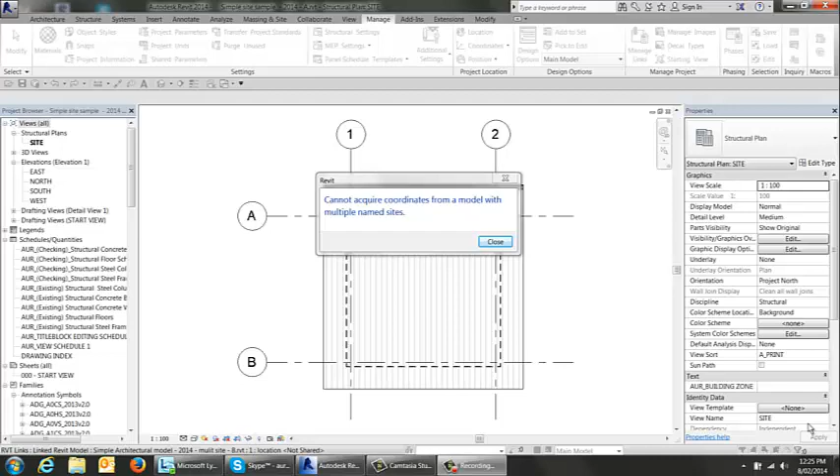Now, what you're seeing on the screen is the error messages directly after I try to do an acquire. So I'm in a model of my own making, and that's an architectural model, as we've seen before, and I try to acquire the coordinates. Now, Revit's error is cannot acquire coordinates from the model with multiple named sites. As I mentioned to you before, this is an example of one Revit model with multiple locations. So in the example of our little shelter we've talked about before, this particular building is used multiple times on the one large site. One Revit model, but multiple stored locations.

So what I'm going to do first is just show you how to establish more than one location in your project. So you're driving it, you're setting up the locations. The second example I'll show you, same example, but this is an example where you have to establish your models in the correct place from an architectural model with the shared coordinates. So it'll be evident what I'm talking about and just how to do it. If you're lucky, the architect or whomever will give you a site model, which will make your job a bit easier. But if you haven't got a site model, this is the workflow.

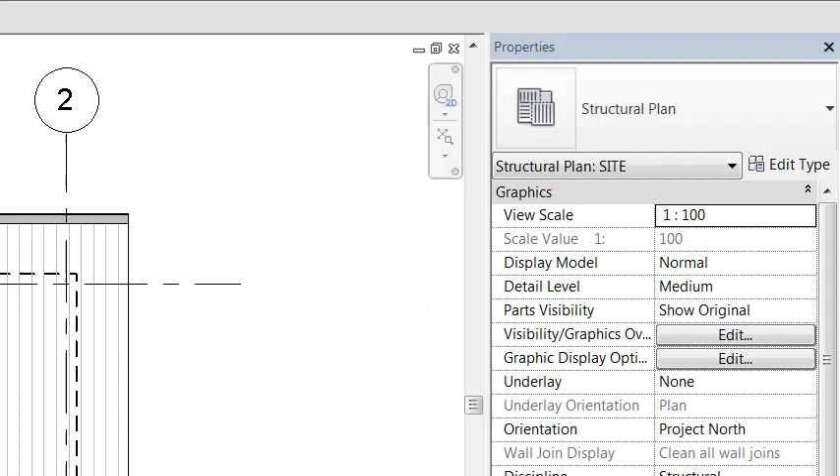But anyway, first I'll go through the example of you're in control, you're wanting to store multiple locations in your model. So what I'll do first is just unlink my model that I had that error from. Okay, so I'll just get rid of that model. Now, this is a new model that I've created. It's just called site. The example here is I want to establish a site model so I can store multiple locations in the building model I'm going to add. Now, the building model I've got has shared coordinates already. This site model hasn't. So the building I've got is just one location, but it's got site coordinates for one of the locations, and this is a blank site model.

So the workflow is as follows. Just before I go on, I've actually established a view called site with unlimited top, unlimited bottom, unlimited view depth, and then that maximum number, which is 6 nines, that Revit will take for the cut plane. So we've got a plan view here that's basically limitless up and down. So wherever I bring this model in, we'll see it.

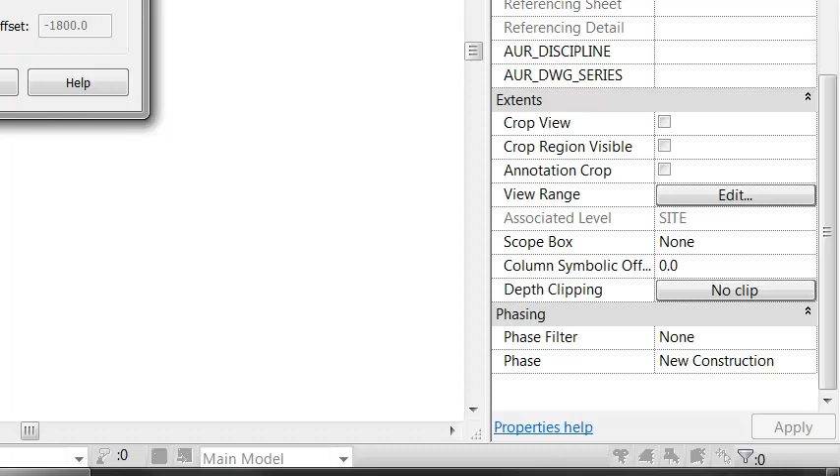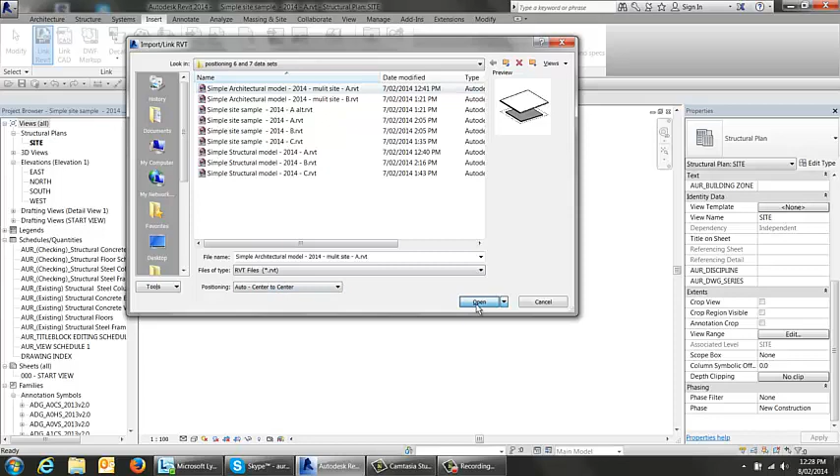Okay, so the first step is I will just link Revit, and all these data sets are available for you to have a play with yourself. So I'm going to pick the simple architectural model, so it's data set A, and I'm going to insert center to center. So there's the model come in as we've seen before. Okay.

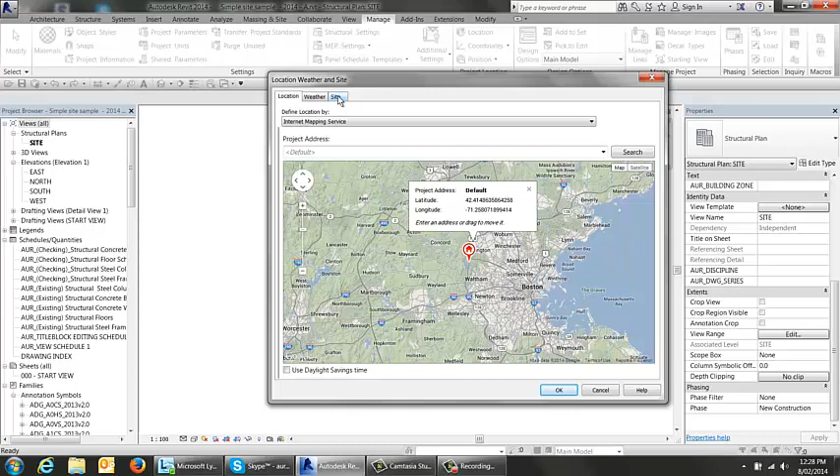It's an American program, so it's set for Boston as a default. And here's the weather in Boston through the year, the minimum and maximum temperatures. This is used for heat load calculations in MEP, etc. Daily mean range, blah blah blah. It knows where the sun rises and sets. So when you're doing your projects, it's really simple to set up the correct internet or GPS location.

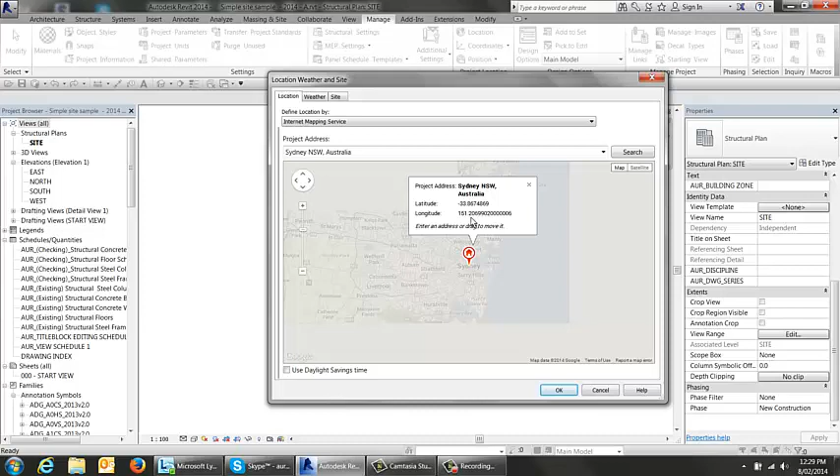So you just click in there, and I'm just going to start typing Sydney, Australia, like that, and do a search. It's come up here. Did you mean? Yes, I did. Okay, so we're in much closer now. I'm making this recording from home, and I'm in Darlinghurst, which is postcode 2010. So it's pretty smart, isn't it? That's the old Google Map interface. So it's pretty easy to pick where your project is actually located. Anyway, I just thought I'd show you that.

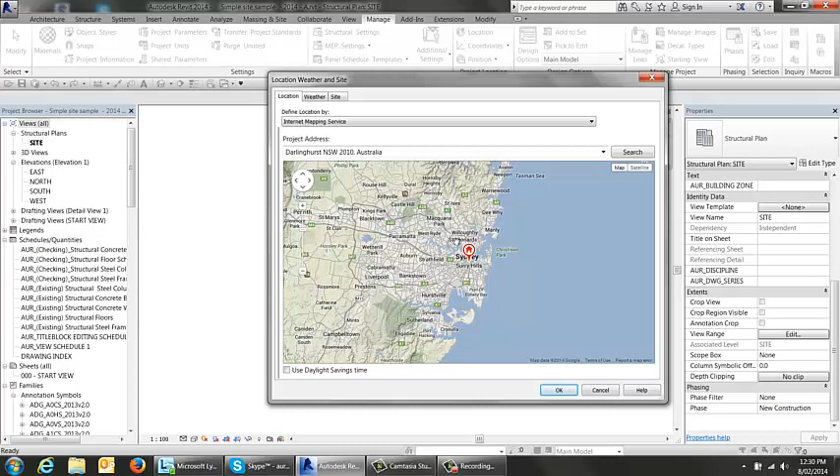And now when you look at the weather, here we are, sunny Sydney, yada yada. Because it's the stored GPS internet thing, it knows about sunset and sunrise and daylight saving, all that sort of stuff. So it's invaluable for your heat load calculations, shadow lines if you're doing rendering. So it's all quite useful stuff, but it's all there in the background.

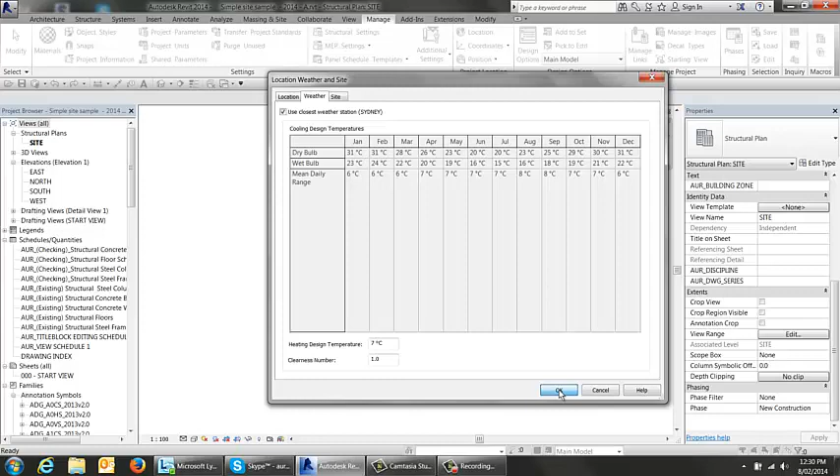Okay. So as before, I've got a model here, and currently it's not shared because I've just inserted it. I keep on saying inserted, I mean linked. It's not inserting, it's linking it, and it's not shared. So as before, we're going to go to Manage Coordinates, and we're going to acquire.

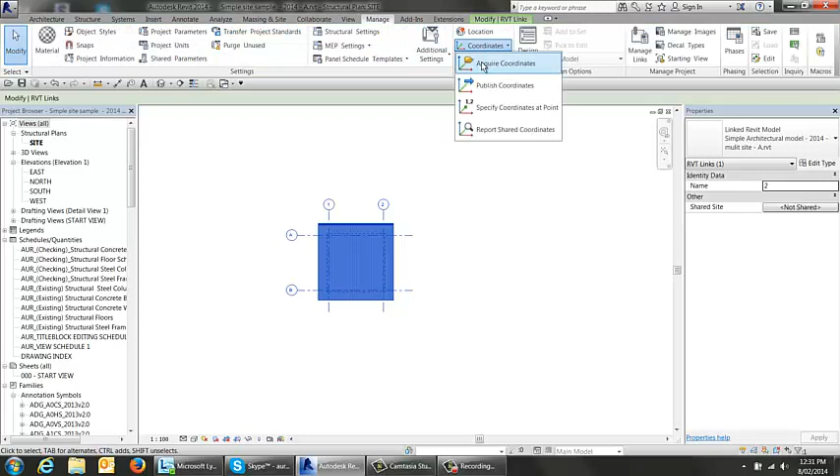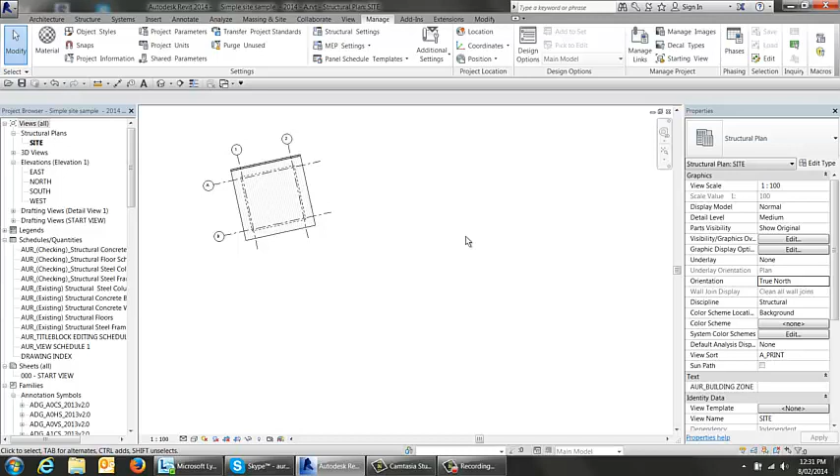Okay, so now we know what's happened. I've hit acquire, so I'll now change the view to true north, and there's our building location spun around in terms of true north. So I'll leave it in the true north view, and now I'm going to just click the model again, and it's now picking up the internal, which is the saved location, the only location within this model.

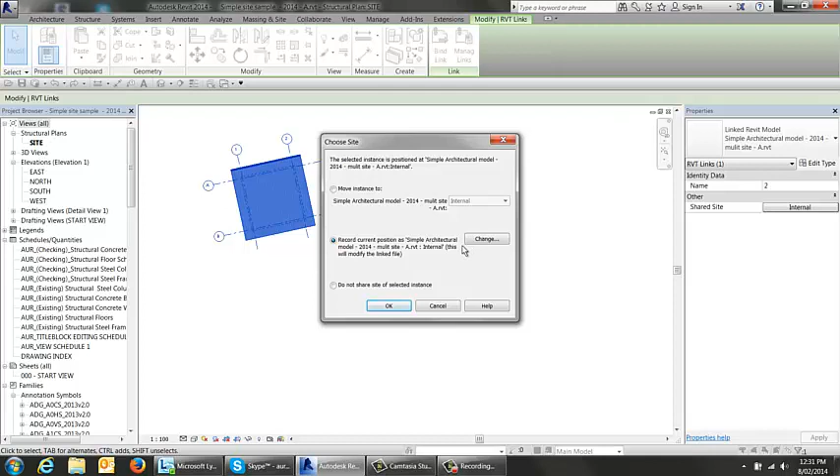I'm going to click this, and we're going to deal with 3 locations of the site. They're going to be called asset 1101, 1102, and 1103. So the 3 different asset numbers. So what I'm going to do here, I've just gone internal, and I'm going to hit the change button, and that's what's reported there. That current is this internal here. So I'm going to rename that. I'm going to say I want you to be called,

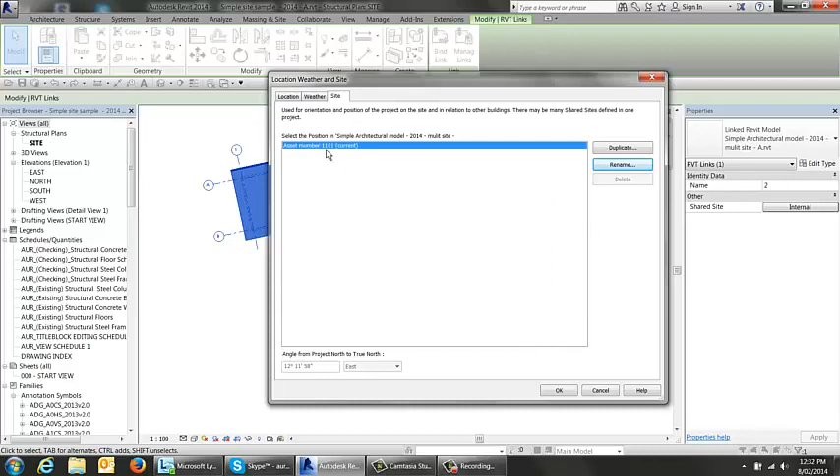poorly spelt, asset number, sorry, fingers and thumbs today, number 1101. Okay, so now that says 1101, and I'll go OK, and OK again, and you see this now says asset number 1101. Now what I'm going to do is I'm going to copy this thing twice. I'll copy it to there, and I'm going to copy it to there.

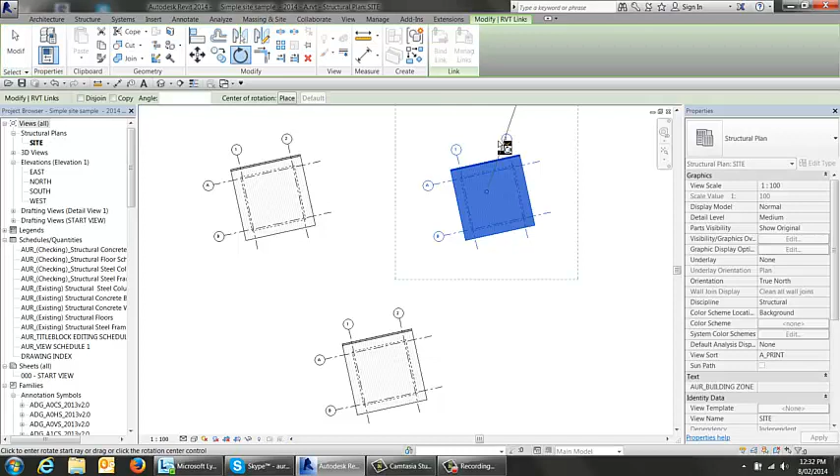Now you'd have an underlay of CAD or something, you would know exactly where these things were going to go. So first thing I'm going to do is this version of the building is rotated 60 degrees. Right? This version of the building, pull down here, drop down there, is running true north. Right, so that's the configuration we want. This one is a shared site, still called Asset 1101. This one, because I copied it, is not shared, and this one is not shared.

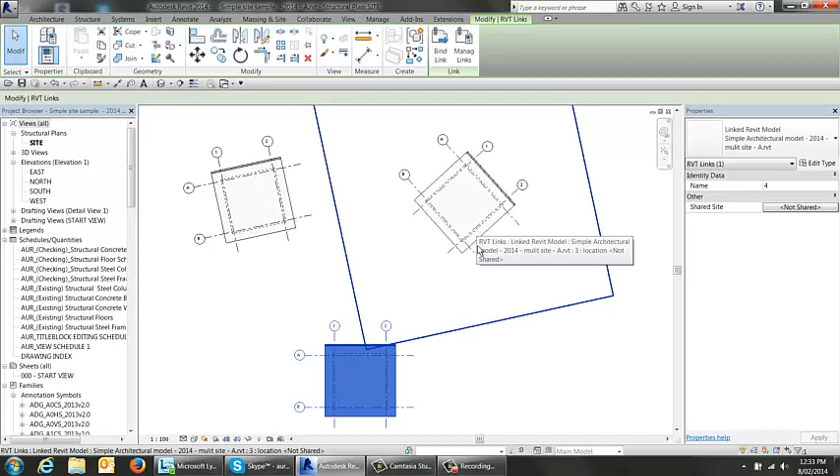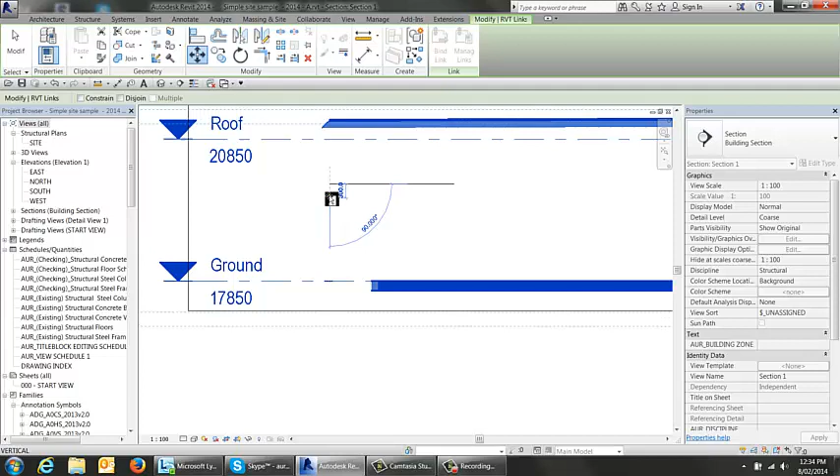Okay. Now, little other complication is this version here is 150 mils lower than this one, and this version here is 800 mils lower than that one. So we'll go and just cut a quick section, view section. So we'll cut a quick section through here, and this version here, move, is 150 mils down. So it's actually RL 17700. So I've just moved it down 150.

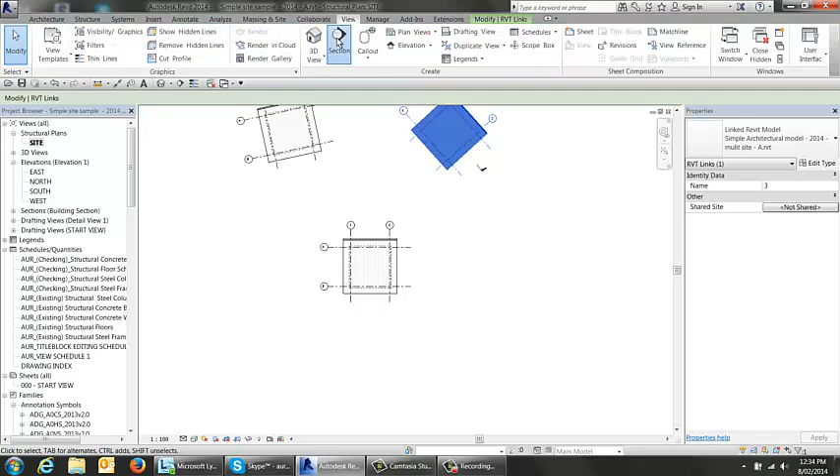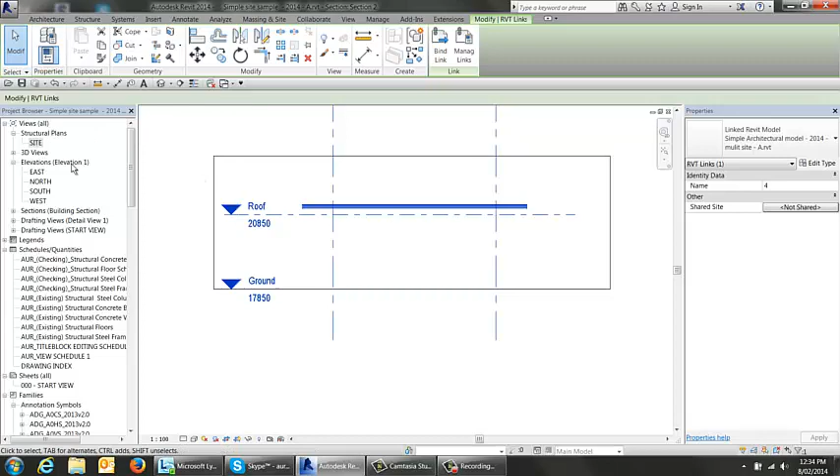Come back to the plan again, and this version here is 800 mils down. So view section. I'm going to move it down 800. Back to plan. So this is shared site. These two are not shared, but I've actually moved them in the correct place relative to the shared site.

So this guy here now, it's not shared. I'm going to pick this button here because it's in the right place now. I'm going to go, okay, I want to record this position. I'm going to duplicate. That's the one that's in use, and I'm going to call this one asset number 1102. And I'm going to go OK, and I'm going to go OK. So this one now is asset 1102, and now this one shares the same site. It doesn't say not shared, it is now asset number 1102.

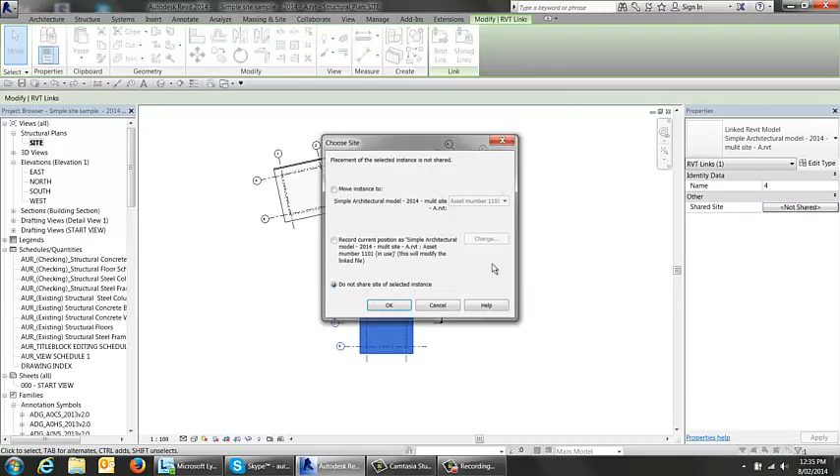Likewise, this one, now I've adjusted the position and the RL, I'm going to record, change, and I'm going to duplicate again, asset number 1103. And now you see this one is called asset 1103. Now, this is just local to this file at the moment because I'm just playing with copies of the model. Now, I'm just checking my notes here for a minute and making sure I'm not missing anything.

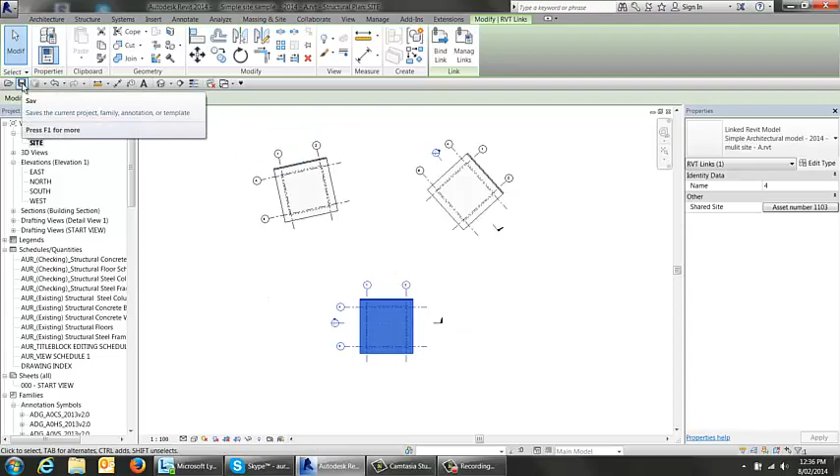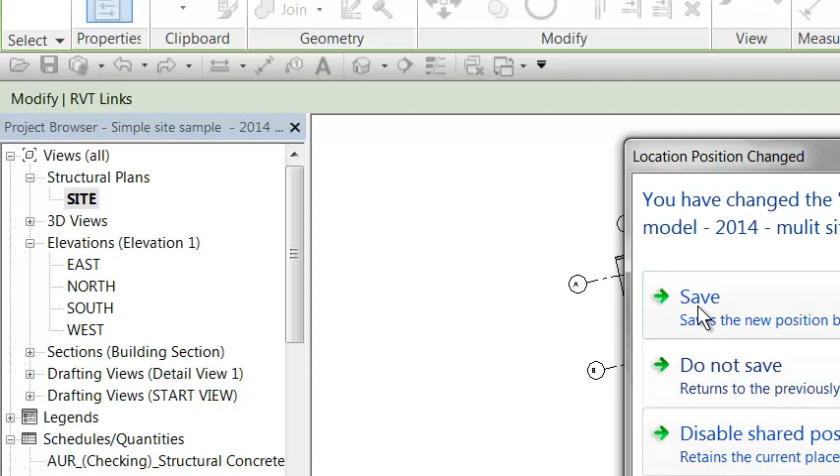Right, the next stage is, once you've got to there, just hit the save button on your master site plan. And you see this message pops up, which you may not have seen before, and it says you have changed the current position in Simple Architectural Model 2014 multi-site A, which is the data set. Do you want to save, do not save, disable sharing? Well, I want to save. Okay, now what Revit's done, even though this model isn't open, and there's 3 versions of it there, it's written those shared coordinates back, those multiple locations, back to the master file.

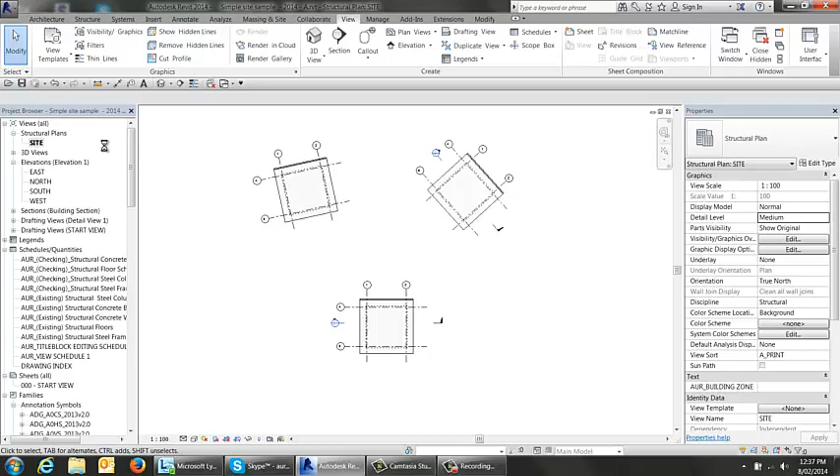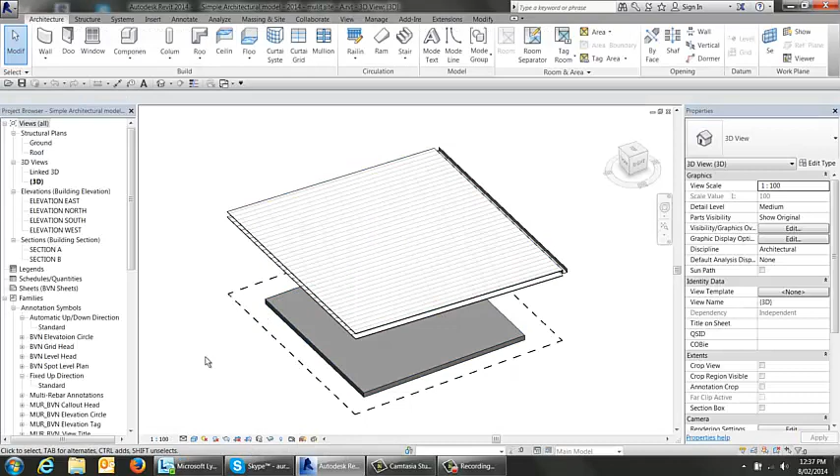So I'm just going to quickly close where I'm at. And I'm going to open my Simple Architectural Model A. You see how the date's changed, and there's the back file, and this is the one I've just created. Well, I haven't created it. Revit's done it for me without even opening the file. Now I'm going to open. Now here he is. He's exactly the same as it always was. We've got ground floor and we've got roof plan, yada yada yada.

However, what we have that's different is if we come here to manage and go to location and go to site, there we are. Lo and behold, there's now 3 stored locations. 1101 is the current, because before we renumbered it, I didn't spell that very well, did I? Anyway. Before I'd renumbered it, it was called internal, and there's the other 2 locations. Now, what this will give you is the ability to pull this model into other sites, collaborating with others, and it'll know which location to go to.

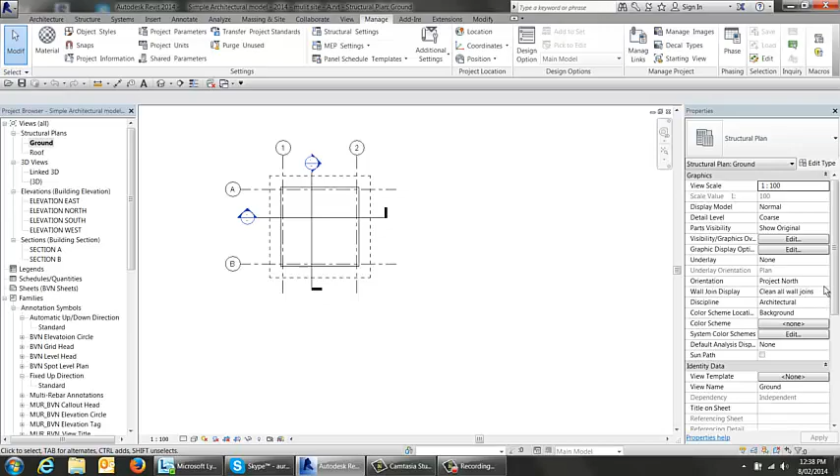Now, I'm just going to go to True North. So here's our model, right? Now, just to show you what Revit does, you're not shifting anything. Nothing's moving in the model. This is what I'm talking about, Revit moving the world underneath. Now, if I just come here and go location and go site, and select asset number 1102, I'm going to make current. See how the current changes from the top one to the middle one? Now if I go OK, oh, there's the other one.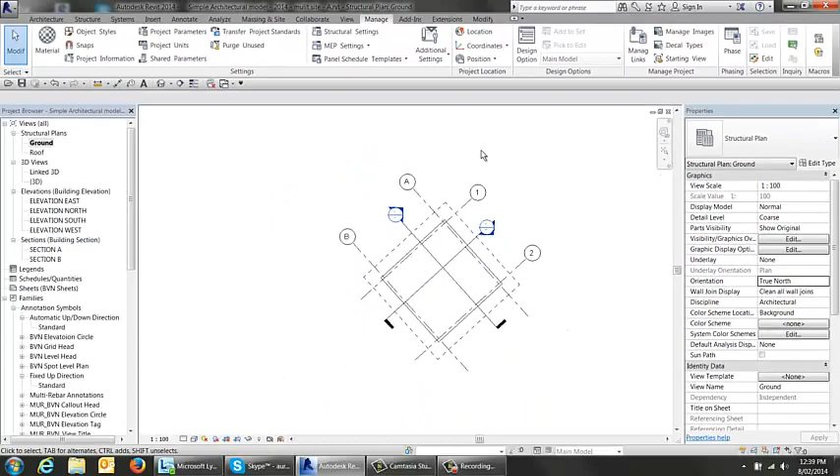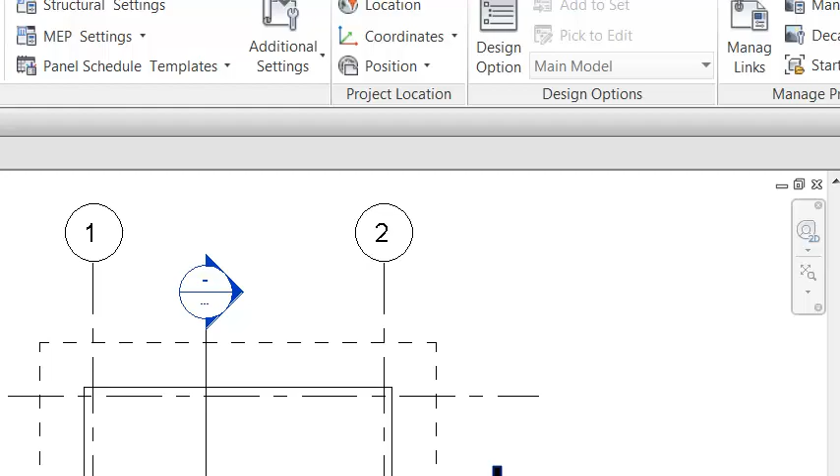And then there's a third example, because we've got 3 in this site. If I come here, go location, go site, make current, and there's the 3rd location. See, we're still set to True North. Now later on, I'll give a more detailed example of that, just to show you that it does work, and it does work by moving the world, not the model.

So what we've done now, we have established three stored locations in the model, and we've also established a site model that shares those locations as well. Okay, that's the end of this example.